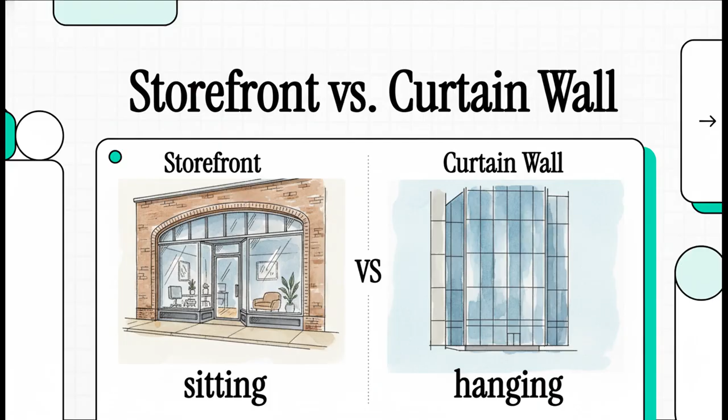You see a grid of glass and aluminum, and you think, it's all the same, right? Wrong. In the world of architecture, storefront and curtain wall are two totally different animals. They have different rules, different price tags, and you use them in completely different ways. And honestly, getting this wrong on a project is a really, really big deal. So let's make sure we get it right.

Here's what we're going to cover. First, the basics. Then we'll dive into the three huge differences: how they're built, how they handle water, and when and where you use them. And hey, for all of you out there studying for your architecture exams, you're going to want to stick around for that last section. Seriously, it's just for you.

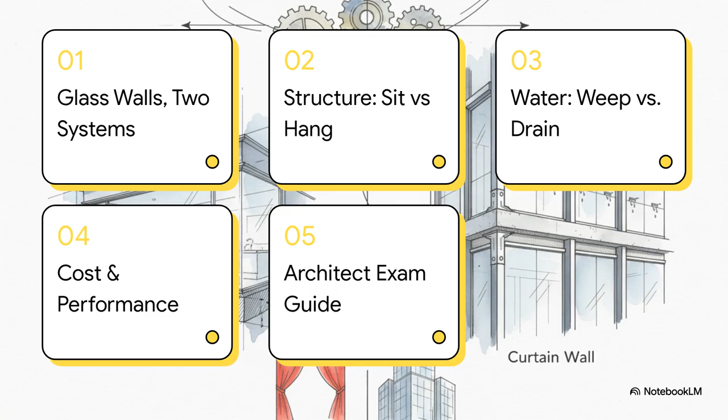Okay, first things first. Before we can talk about what makes them different, we have to understand the one huge thing they have in common. Both of these systems are what we call non-load-bearing facades. Now, I know that sounds a little technical, but trust me, this one concept is the key to understanding everything else. So, what does that actually mean? Well, it means neither of these glass walls is holding the building up.

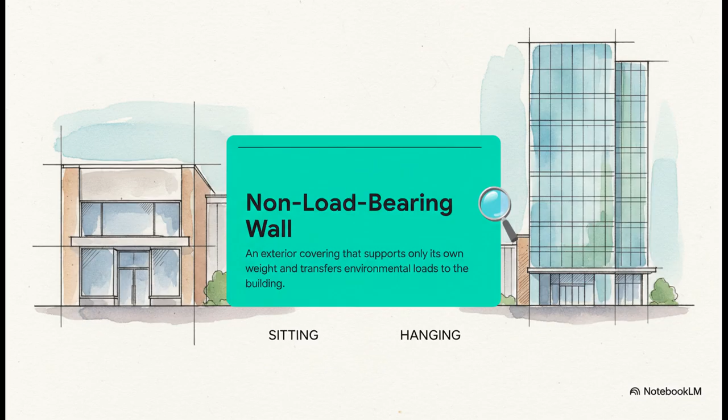Not at all. Think of the building's steel or concrete frame as the skeleton. That's what's doing all the heavy lifting. The glass wall is just the skin. It's a high-tech envelope that keeps the rain and wind out and lets the sunshine in. That's it. So here's the simplest way to start thinking about the difference.

Storefront systems, they're for your low-rise stuff, usually just the ground floor. Think retail shops, restaurants, office lobbies. But curtain walls, those are the heavy hitters. They're designed for the big stuff, mid-rise and high-rise buildings, creating those beautiful, seamless glass facades that can stretch up dozens of stories. And now we're going to get into why.

Okay, pay attention because this next part is everything. I mean it. If you only remember one thing from this entire explainer, make it this. The single biggest, most fundamental difference between a storefront and a curtain wall is how it physically connects to the building. And these diagrams show it all.

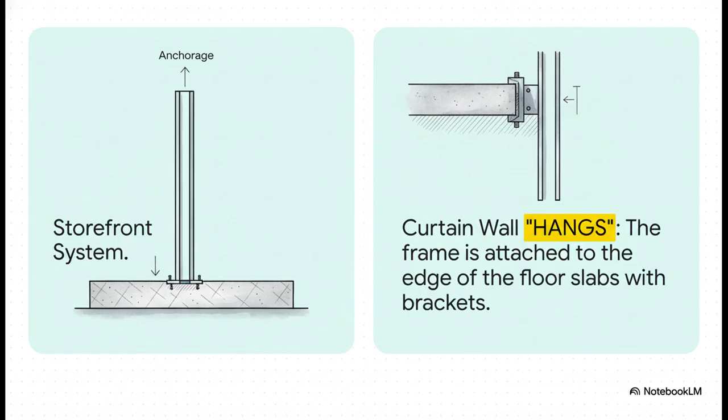Just look on the left. You see how that storefront system sits inside the opening? It's resting right on top of the floor slab. Now look to the right. The curtain wall is a whole different story. It hangs outside the building structure, attached to the very edge of the floor with those special metal brackets. It is, quite literally, a curtain of glass hanging on the building. And that one difference, sitting versus hanging, changes everything.

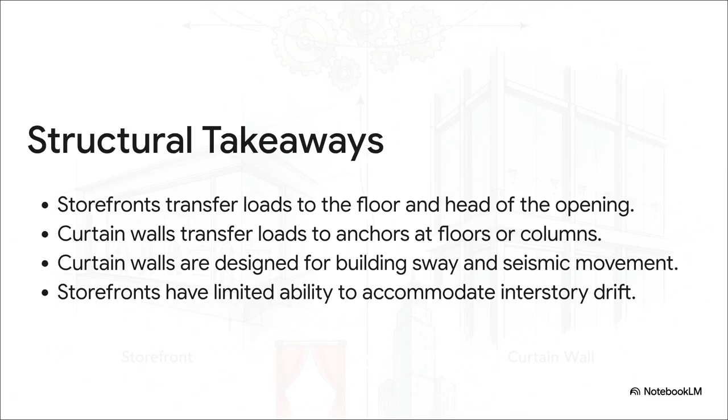You see, big buildings actually move. They sway in the wind. A curtain wall, because it's hanging, is designed to handle all that movement, what we call inter-story drift across many, many floors. But a storefront? It's just sitting snugly in its little opening. It just can't handle that kind of movement. And that's exactly why you really only see them used for shorter heights, usually about 10 to 14 feet max.

All right, on to major difference number 2, water. Rain, snow, condensation. Water is the #1 enemy of pretty much every building on the planet. So how a facade gets rid of it is absolutely critical. A storefront system is pretty straightforward. Let's follow a drop of water, right?

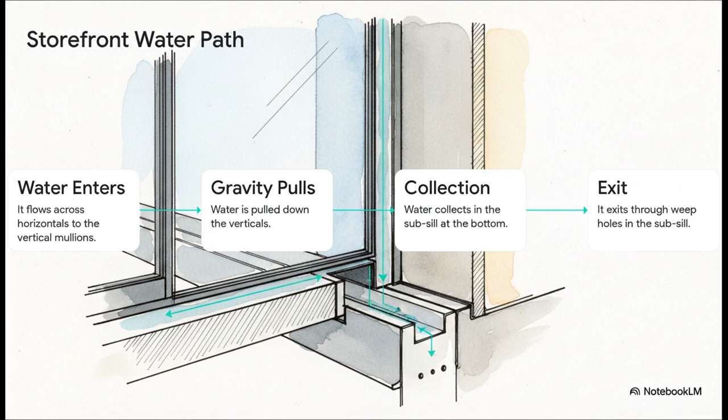It gets in, travels along a horizontal piece, hits a vertical one, and gravity takes over. It all flows down, down, down, until it collects in this one channel at the very bottom called a subsill. Then it drains out through tiny weep holes. It works great for a single story. But can you imagine trying to manage the rainwater from a 40-story skyscraper in one little gutter? No way. It would be a disaster. And that's why a curtain wall is so much smarter about it.

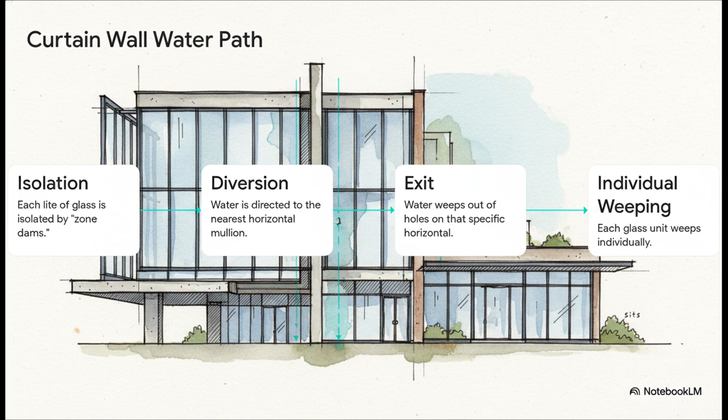Okay, so we've got the how. Now let's talk about the practical stuff. The where, the why, and maybe most importantly, the how much. The applications really just make sense once you know how they work. Storefront is your go-to for the ground floor. Think about the Apple Store, a car dealership, the entrance to a shopping mall. Any place you need big, beautiful glass at street level.

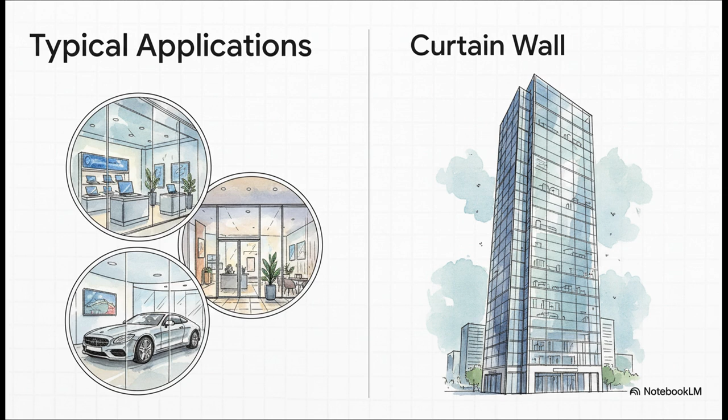And curtain wall? Well, that's for pretty much everything that goes up from there. Office towers, hotels, hospitals. Anytime you need that continuous, high-performance glass skin that spans multiple floors. And here we go. The question everyone wants to know. What's the cost? Well, the difference is huge. A storefront system is dramatically cheaper. We're talking 50 to 60% less, sometimes even more, than a curtain wall.

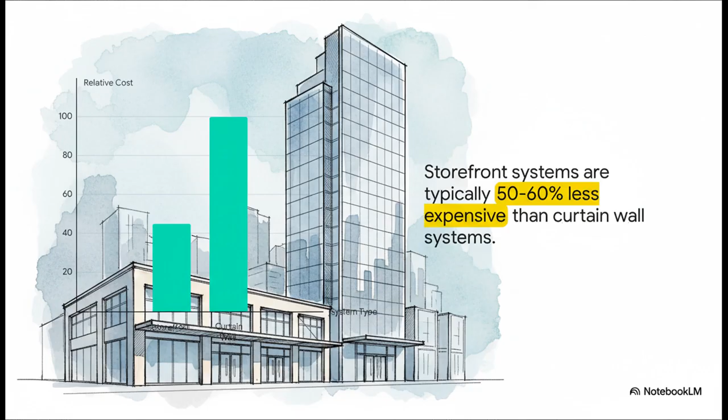Storefronts are more limited for sure, but don't count them out. Modern ones are really efficient, especially if they have what's called a thermal break. That's just a fancy term for a little plastic insulator inside the metal frame that stops the cold from getting in or the heat from getting out. At the end of the day, you pick the right tool for the job.

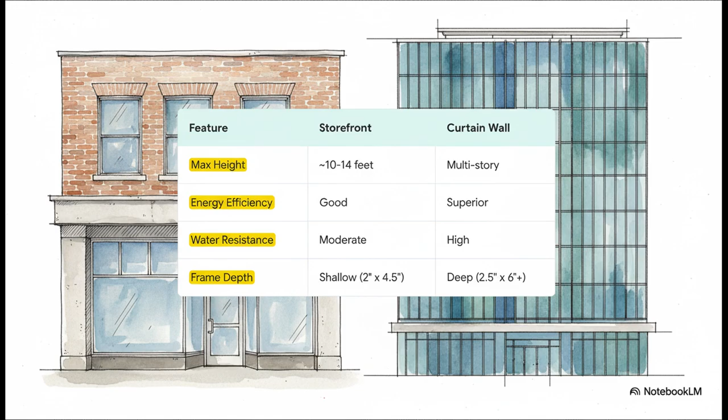Okay, all my future architects out there studying for the AREs, listen up. This section right here is your secret weapon. I can pretty much guarantee you're going to get a drawing on the PPD or PDD exam that asks you to identify the system. Here's how you're going to nail it every single time. I want you to burn this acronym into your brain. ADSFP. Anchorage, drainage, spandrel, fire safing, and profile. When you see a section drawing, just run through this checklist in your head. It'll give you the answer in like 10 seconds.

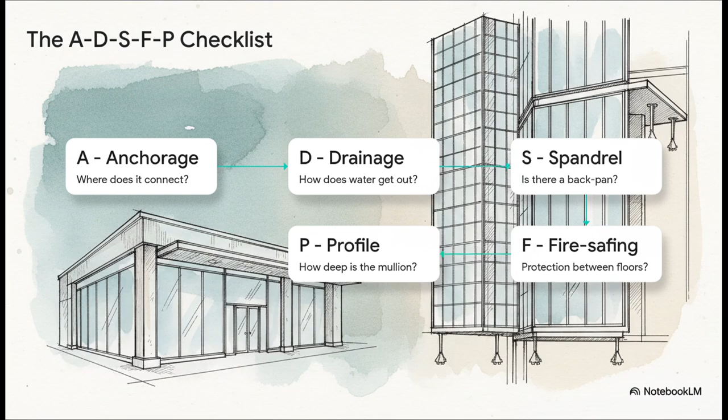But let's focus on the two biggest clues, the ones that are almost always there. A is for anchorage. This is the #1 dead giveaway. Find where the glass system meets the concrete floor. Do you see a bracket holding it on the outside face of that slab? If the answer is yes, then it's hanging. That's a curtain wall. If the frame is just sitting right on top of the slab, that's a storefront. It really is that simple.

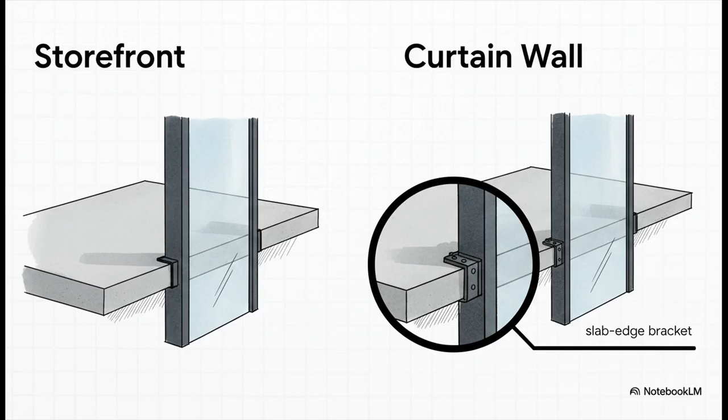And F is for fire safing. This is your other nearly foolproof tell. Because a curtain wall flies past the floors, it leaves a little gap, and that gap is a chimney for fire. So you have to plug it with something, usually this mineral wool insulation. If you see that detail in the drawing, that perimeter fire safing, you can be about 99.9% sure you are looking at a curtain wall.

So when that question comes up, here's how you answer. You be direct, and you use the evidence. The slab edge bracket and perimeter fire safing indicate this is a curtain wall section. Boom. Done. You're not just showing you know the right answer, you're showing you know why it's the right answer.

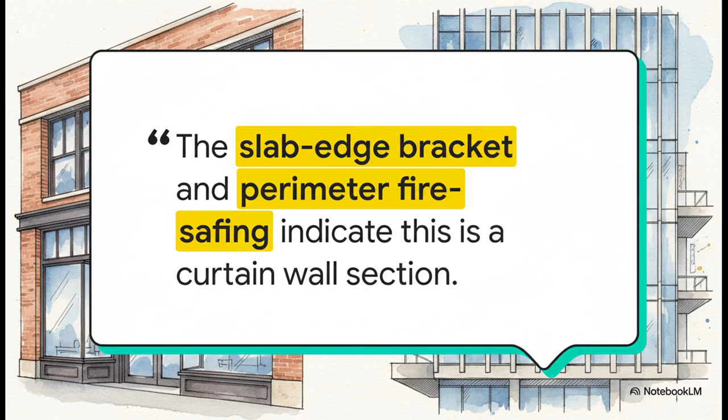So there you have it. You're in on the secret now. The next time you're walking down the street, you won't just see a glass building anymore. You'll see a story of structure, of water, of performance. And you'll be able to look at it and ask the one question that tells you everything. Is it sitting or is it hanging?